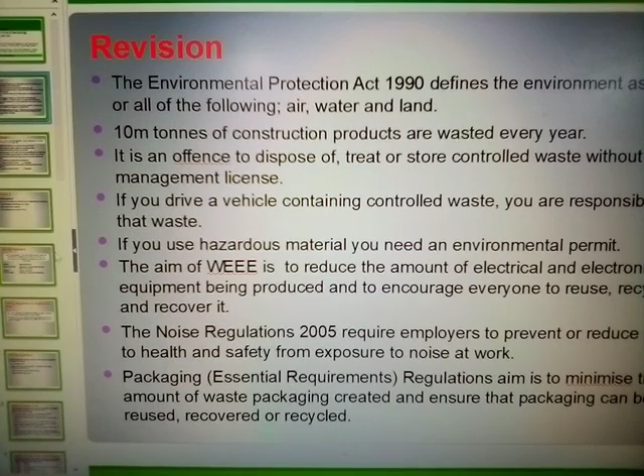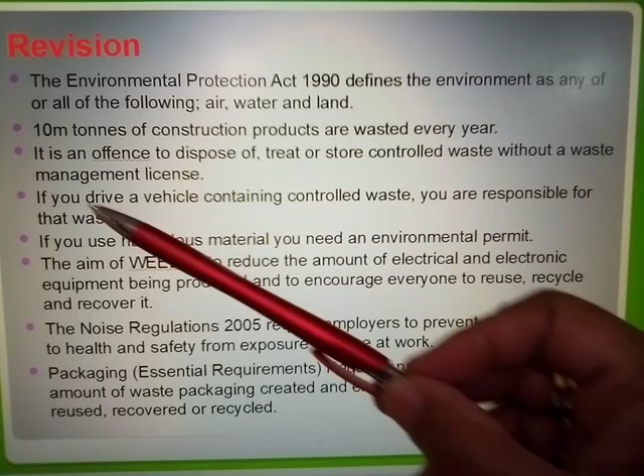Now this just shows us what we were talking about previously in the other section, the Environmental Protection Act 1990 - tonnage, it's an offence to dispose of, etc., if you drive, etc. The information we looked at previously. I don't need to go over this, but you'll need to look at this for yourselves and read the information so you know where you're at.

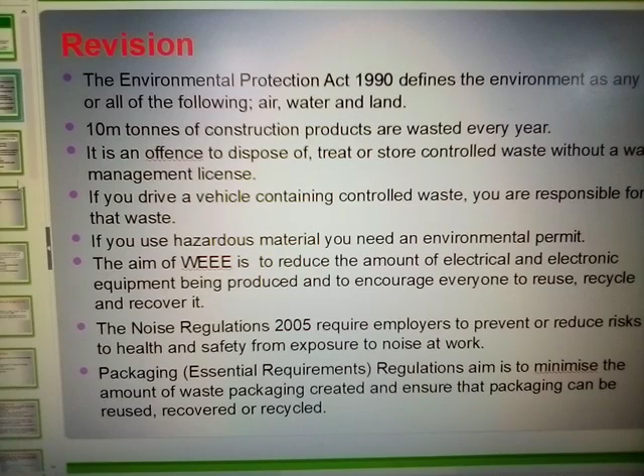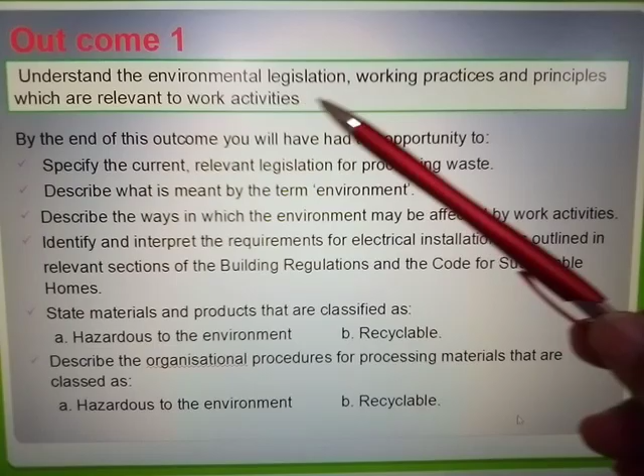Now the outcome that we're going to be looking at is understanding the environment legislation, working practices and principles which are relevant to work activities. And here is your outline for that.

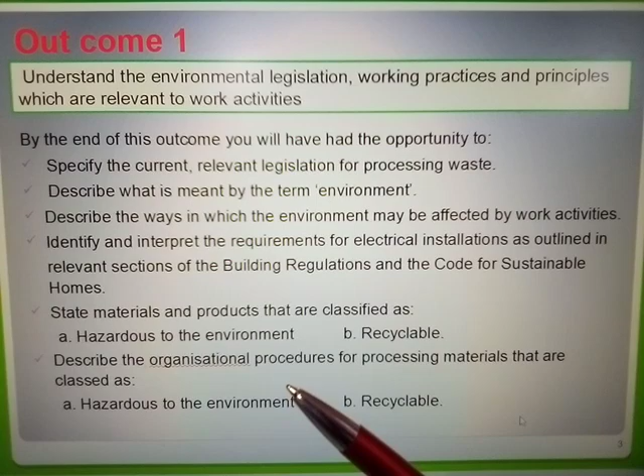So again, read this for yourselves, make sure you understand what's being read, and then do any additional research using the HSE website, because that will give you up-to-date information on any events or changes which have taken place. And again, remember to use the IET regulations.

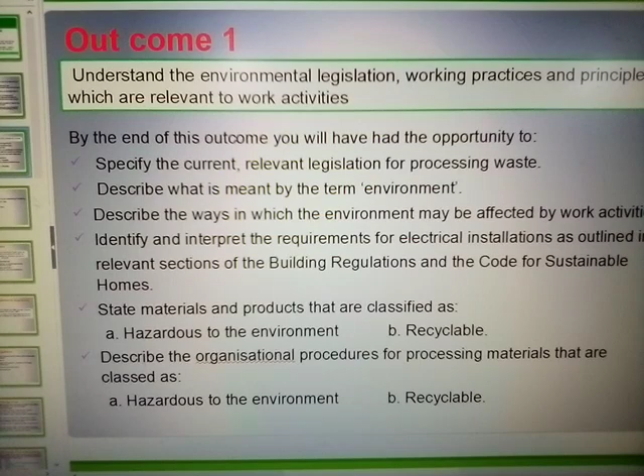Remember one thing, you can never know too much, okay? There is no such thing as too much knowledge. You have knowledge, use it.

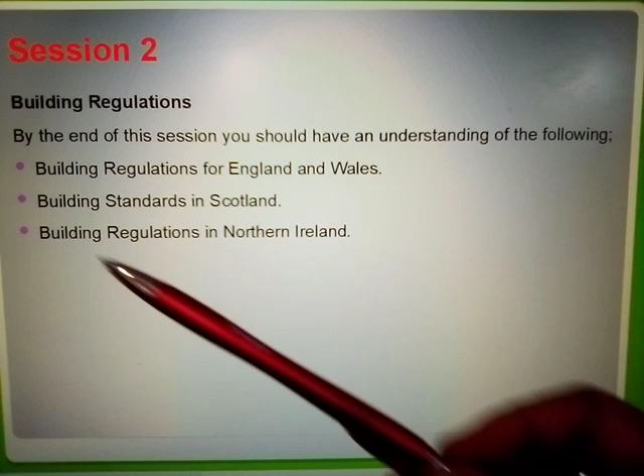Now building regulations - that's what we hope that you would have learned by the end of this session, okay?

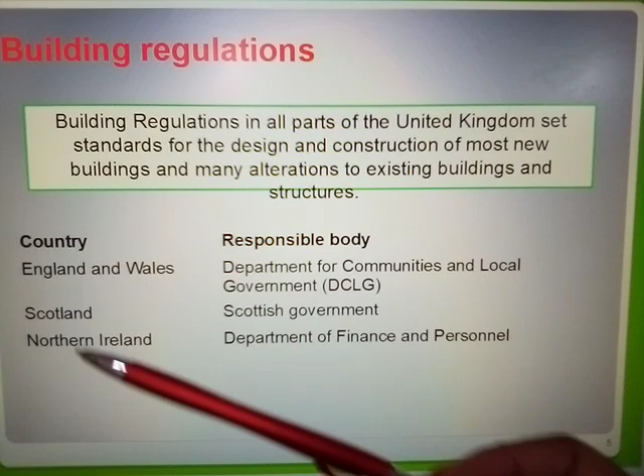Now the building regulations apply to all parts of the United Kingdom, okay? It sets standards for the design and construction of most new buildings and many alterations to existing buildings and structures. Country: England and Wales, responsible body: Department for Communities and Local Government. Now keep an eye on this, because as you know, government departments change and develop new names, okay? And these are where you would find them under in different parts of Scotland, Northern Ireland, okay?

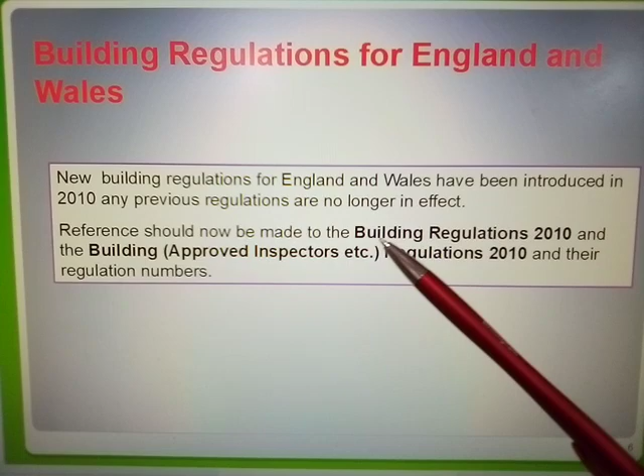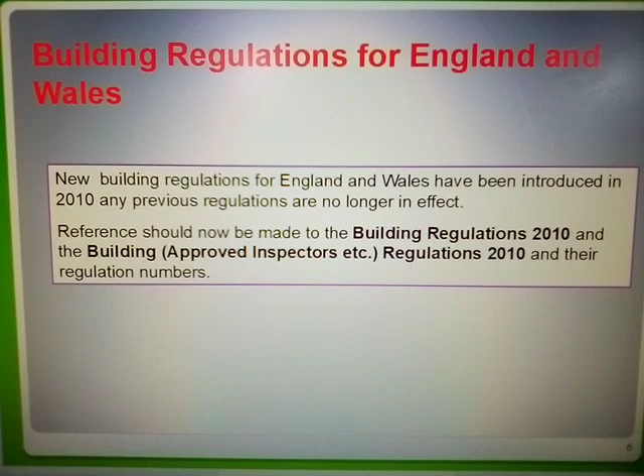Now building regulations for England and Wales. New building regulations for England and Wales have been introduced. 2010 - any previous regulations are no longer in effect. Reference should now be made to the Building Regulations 2010 and the Building Approved Inspectors, etc., Regulations 2010 and their regulation numbers. Now again, be aware that there could be changes to that also since, so we need to keep an update on that, okay?

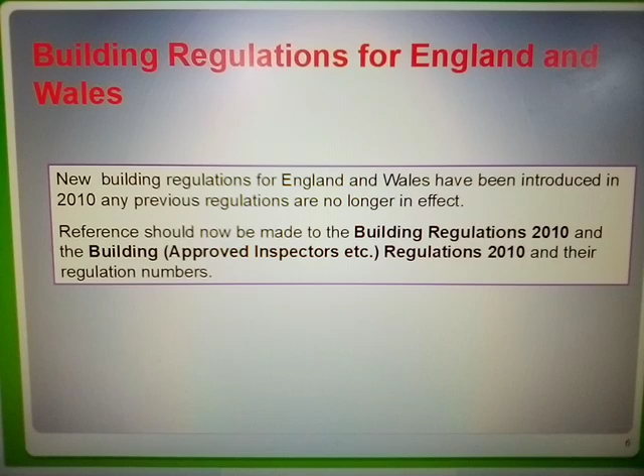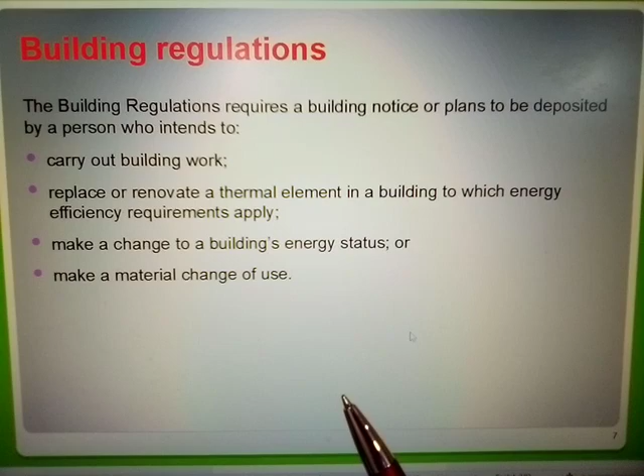Building regulation requires a building notice or plans to be deposited by a person who intends to carry out building work, make a change to building, or make a material change of use. So if you're looking to do any changes, you'll need to be aware that certain legislations will be in place, and you need to check those legislations before you do any building work of any kind. Again, make sure you read this information for yourselves, okay? Building regulations.

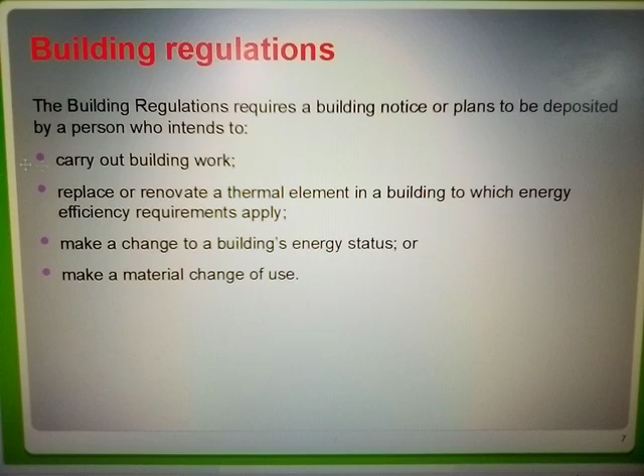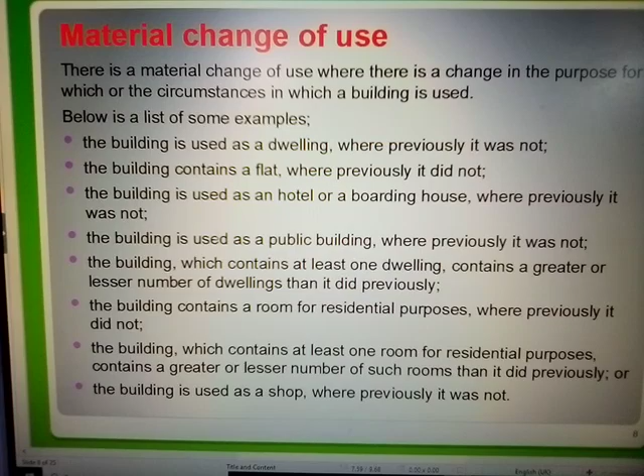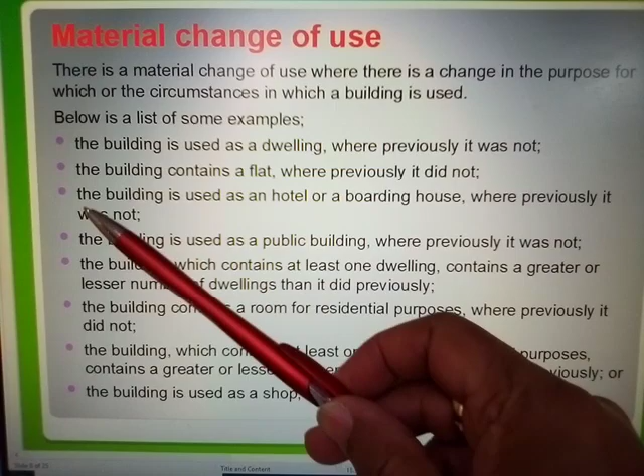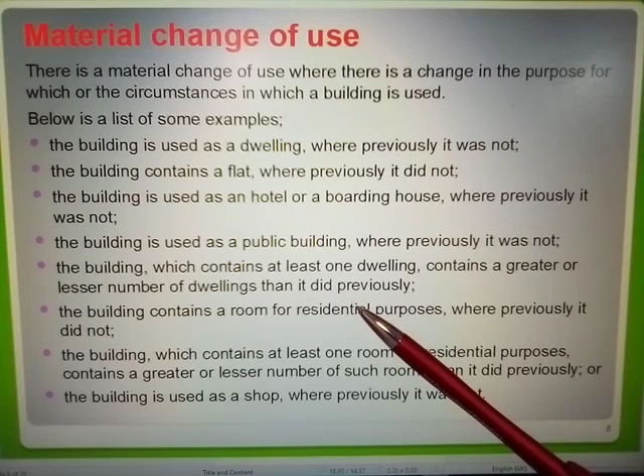Now here, material change of use - this just gives you a list. There's material change of use where there is a change in the purpose for which, or the circumstances in which, a building is used. Below is a list of some examples: buildings used as a dwelling where previously it was not, etc., etc. So again, read the information for yourselves, be aware of the building use, and make sure that you are familiar with this. If you're going to rewire a building, you need to be aware of any legislations that might apply to that building, whether it's a listed building, etc., or not.

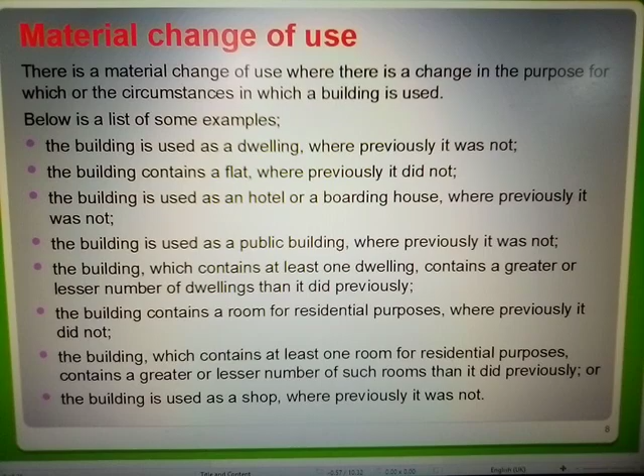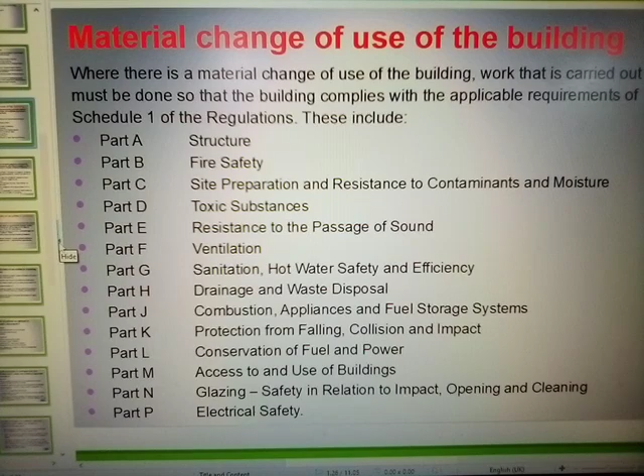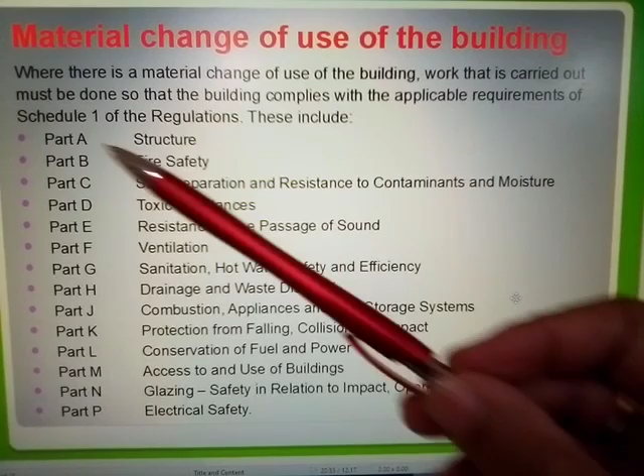Now, material change of use of the building. Where there is a material change of use of the building, work that is carried out must be done so that the building complies with the applicable requirements of Schedule 1 of the regulations.

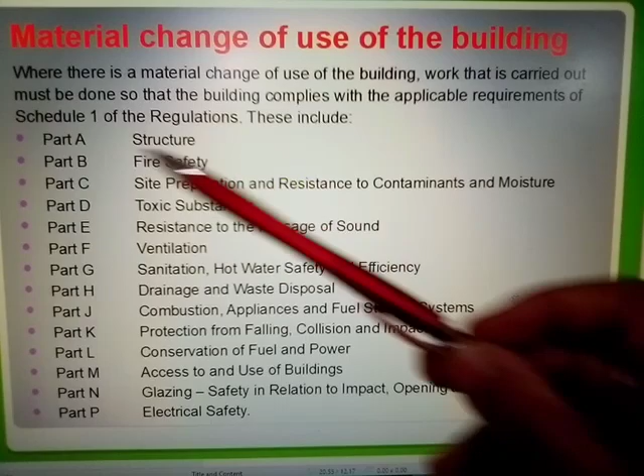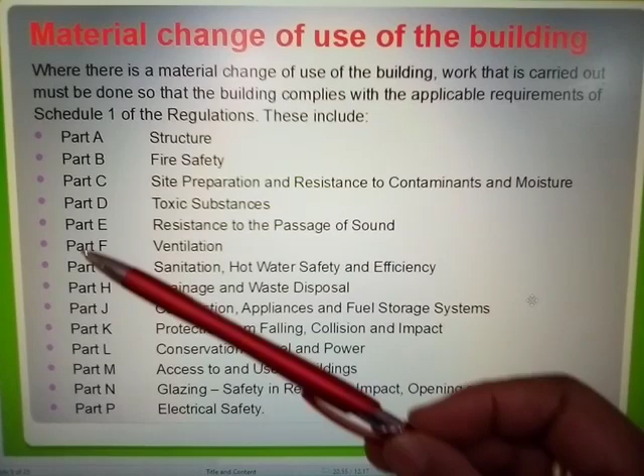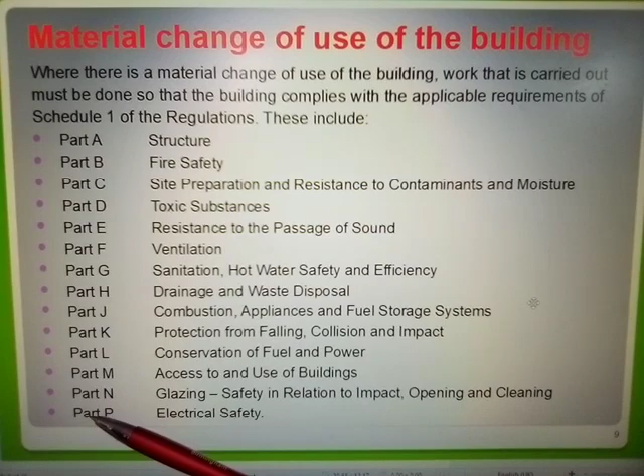These include Part A, structure; Part B, fire safety; Part C, site preparation; Part D, toxic substances; Part E, resistance to the passage of sound; Part F, ventilation; Part G, sanitation; Part H, drainage; Part J, combustion appliances and fuel storage systems; Part K, protection from falling; Part L, conservation of fuel and power; Part M, access to and use of buildings; Part N, glazing - safety in relation to impact, opening and cleaning; Part P, electrical safety.

Okay, and Part P is what will apply to us, but we have other responsibilities in the sense that we also need to comply with certain parts of this as well, because it affects our working environment.

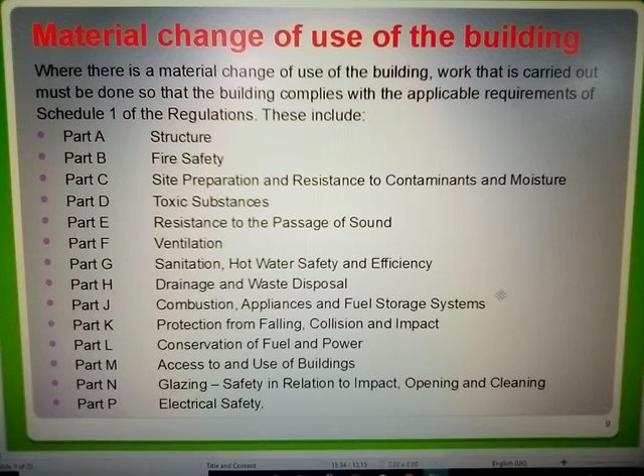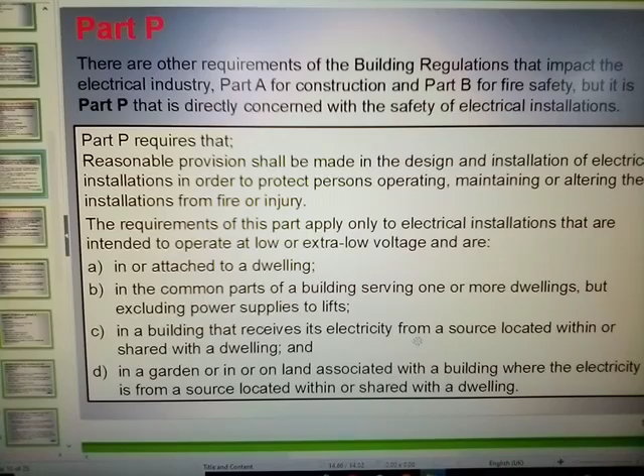There are other requirements of the building regulation that impact the electrical industry. Part A for construction and Part B for fire safety, but it is Part P that is directly concerned with the safety of electrical installations.

Part P requires that reasonable provisions shall be made in the design and installation of electrical installations in order to protect persons operating, maintaining or altering the installations from fire or injury.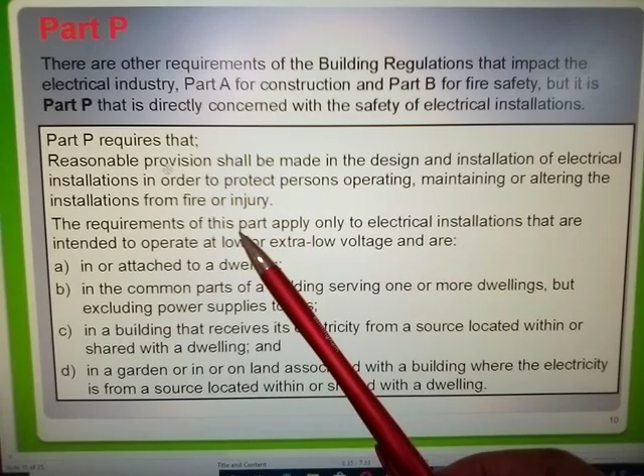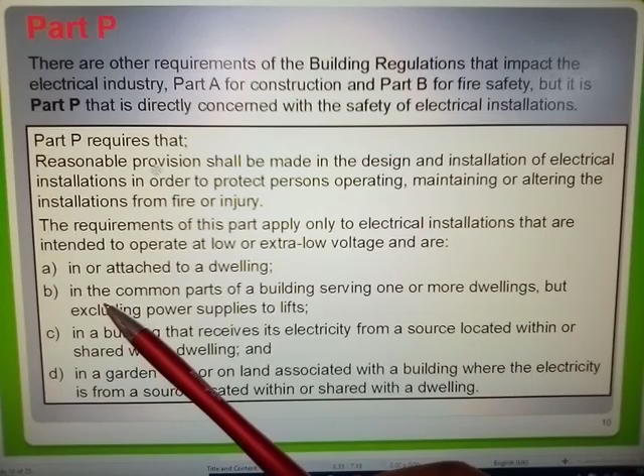The requirements of this part apply only to electrical installations that are intended to operate at low or extra low voltage and are in or attached to a dwelling; in the common parts of a building serving one or more dwellings, but excluding power supplies to lifts; in a building that receives its electricity from a source located within or shared with a dwelling; and in a garden or on land associated with a building where the electricity is from a source located within or shared with a dwelling.

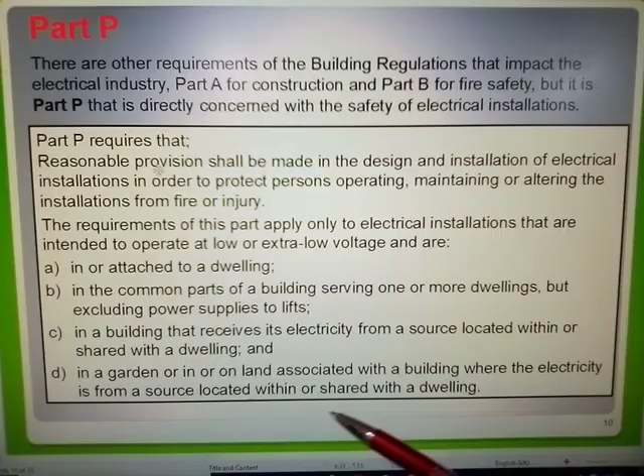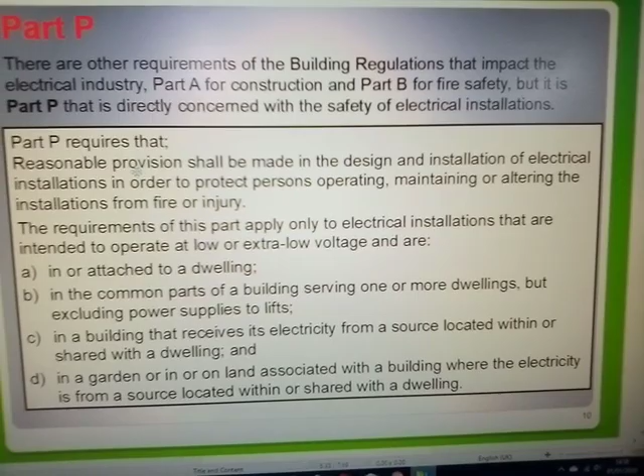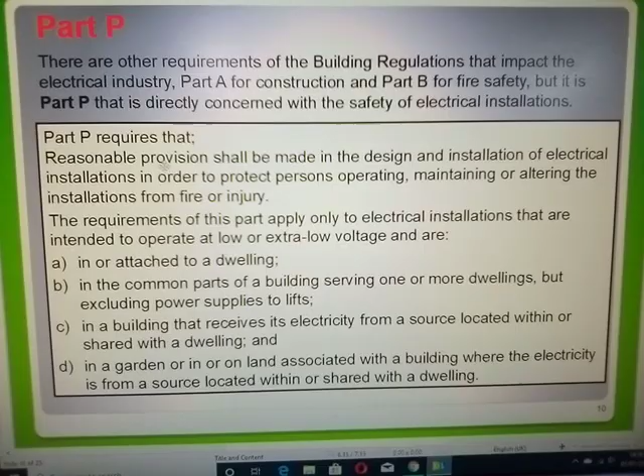Part P is trying to make you aware that in regards to electrical installations, the installation must be done to the IET regulations. Excuse me, I'm still talking in terms of IEE, but let's refer to it now as the IET. I still have some books here actually showing IET and IEE, but we'll stick with IET because that's the current legislation as it stands now - Institution of Engineering and Technology. Refer to those regulations, and all installations should be done to that standard.

You'll find that it actually specifies a section in regards to Part P and what it would expect you to be doing in regards to that. So follow IET specifications.

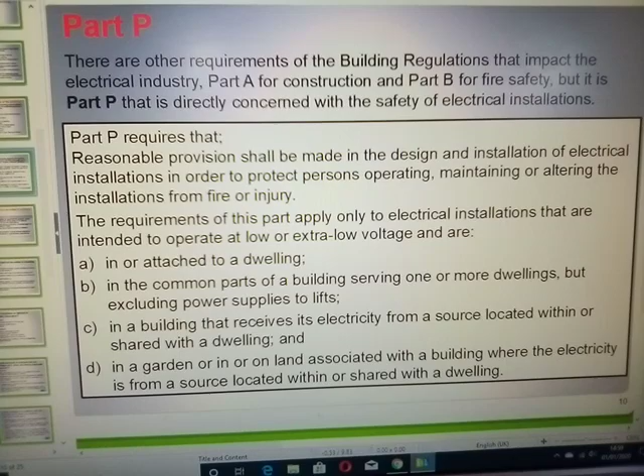I'm just trying to make sure that I've not missed out any slides.

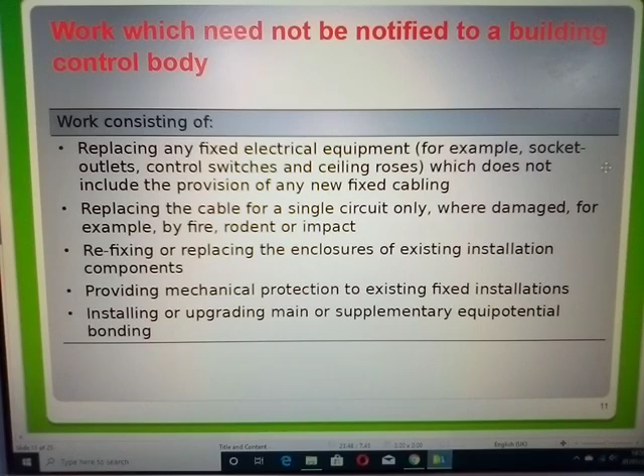Work which need not be notified to a building control body: work consisting of replacing any fixed electrical equipment, replacing the cable for a single circuit, refixing, replacing the enclosures, providing mechanical protection, installing or upgrading main or supplementary equipotential bonding.

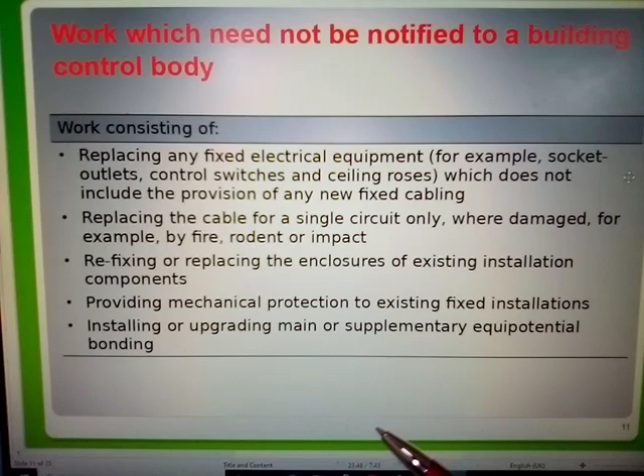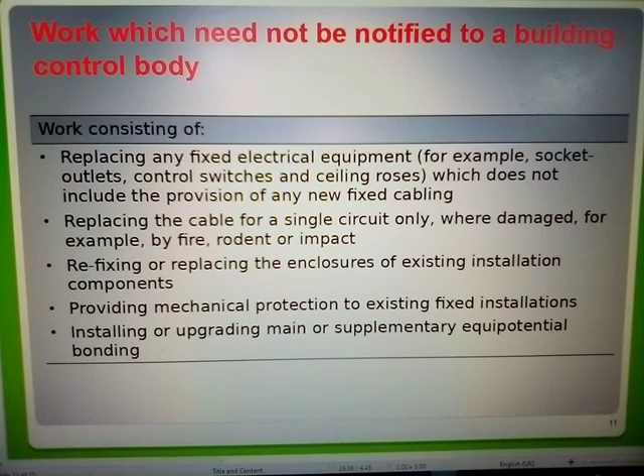Those simple changes are the only ones you're allowed to make, I believe. But again, check in regards to the regulations and check with your controlling body to ensure that you are kept up to date with any changes which are taking place or which have taken place.

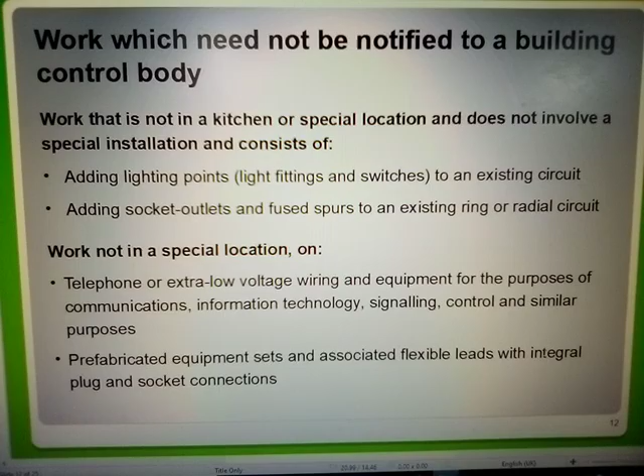Work which need not be notified to a building control body: work that is not in the kitchen, also not in a special location, and does not involve a special installation, consists of adding lighting points, adding socket outlets. Work not in a special location, telephone extra low voltage wiring, etc.

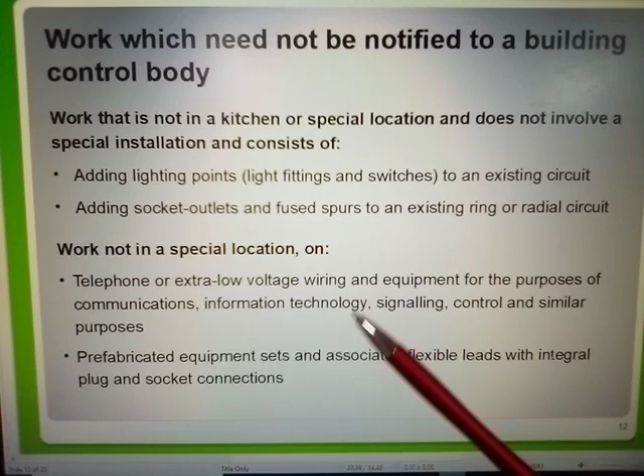You can read this for yourselves, don't need me to read this to you now. So make sure it's all in.

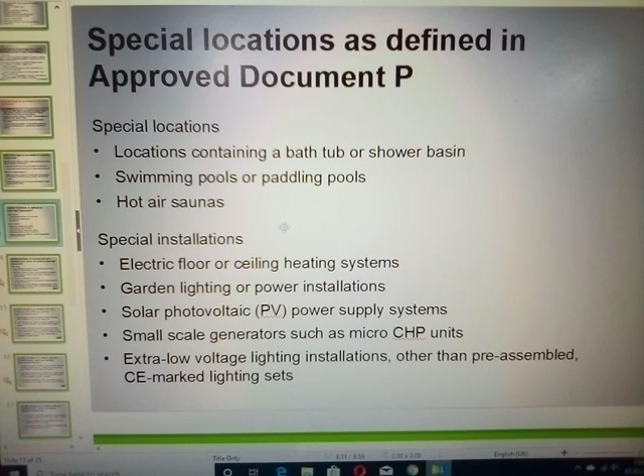Now, special locations - again, this is specified in the IET regs for special locations. Special location: locations containing a bath, tub or shower basin.

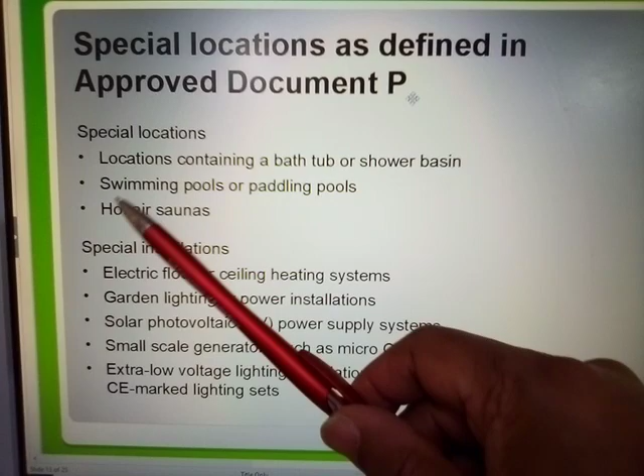Swimming pools or paddling pools, hot air saunas. Now, some of you might have heard of the drowning of a gentleman and two children in Spain recently. You can see here swimming pools are considered to be a special location, so it's interesting to know what events would have caused that tragedy when so much care has gone into making sure such events don't actually happen.

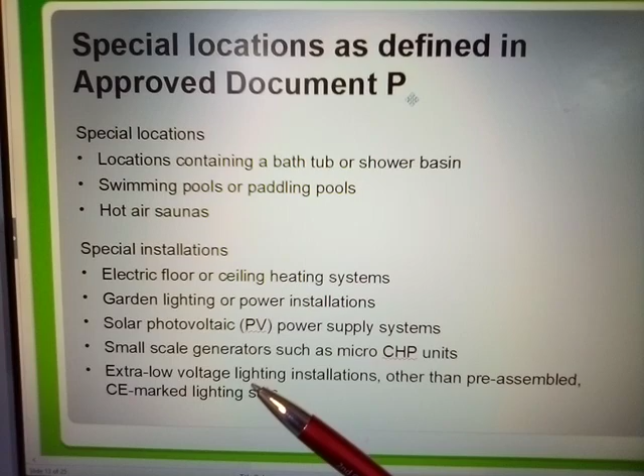But nonetheless, I suppose these things are unexpected.

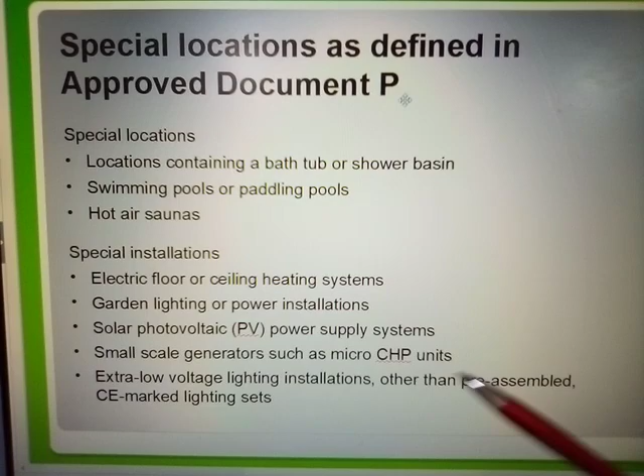Special installation: electric floor or ceiling heating, garden lighting, solar photovoltaic cells, small scale generators such as micro CHP units, extra low voltage lighting, etc.

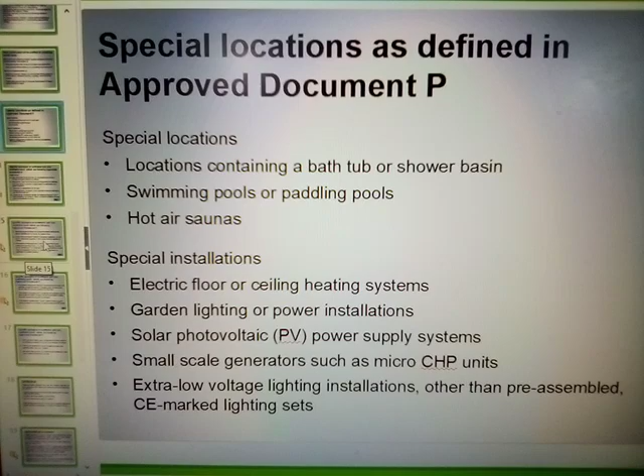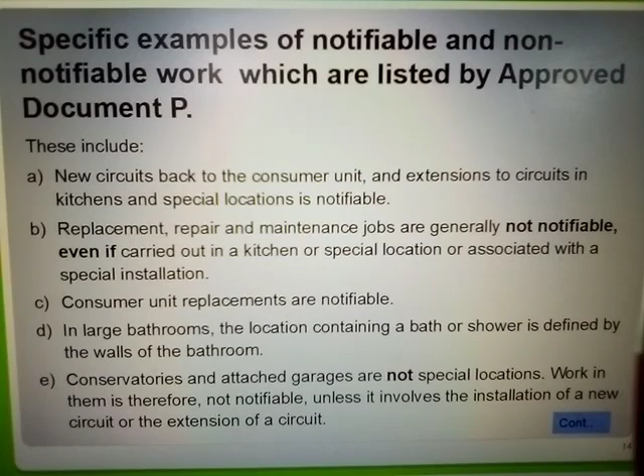Right, specific examples of notifiable and non-notifiable work which are listed by approved document P. Now, for some reason it's come to my mind there may have been some changes regarding document P, but I am not quite sure. Please check and confirm for yourselves that document P is still part of the specifications and still required. Something I read the other day seems to tell me it may have been amended or removed, but I could be wrong.

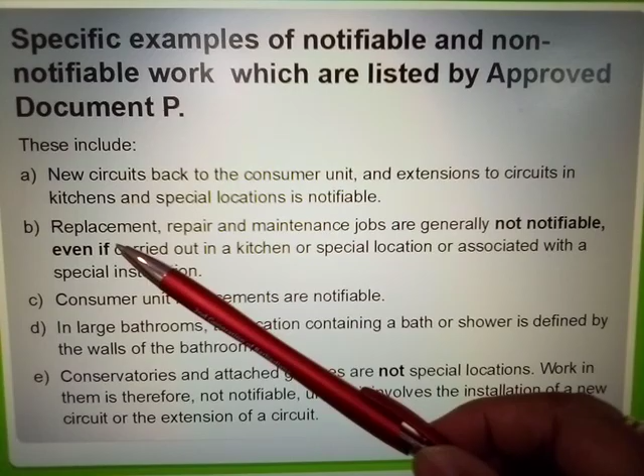Again, read this for yourselves, you don't need me to be reading this to you. Okay, new circuits back to the consumer unit, replacement, repair, and maintenance jobs. Consumer unit replacement is notifiable.

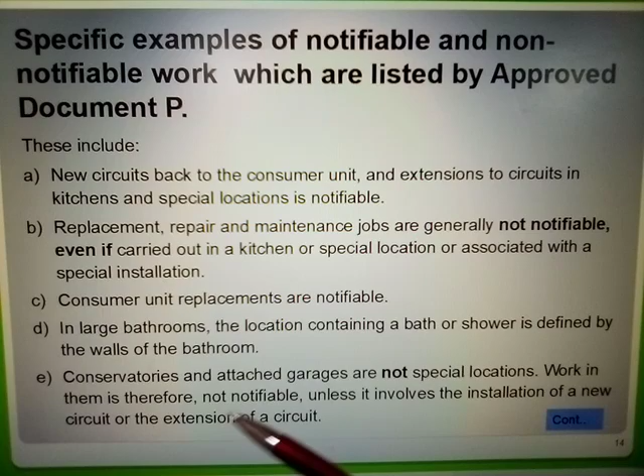In a large bathroom, the location containing a bath or shower is defined by the walls of the bathroom, conservatories, attached garages, etc.

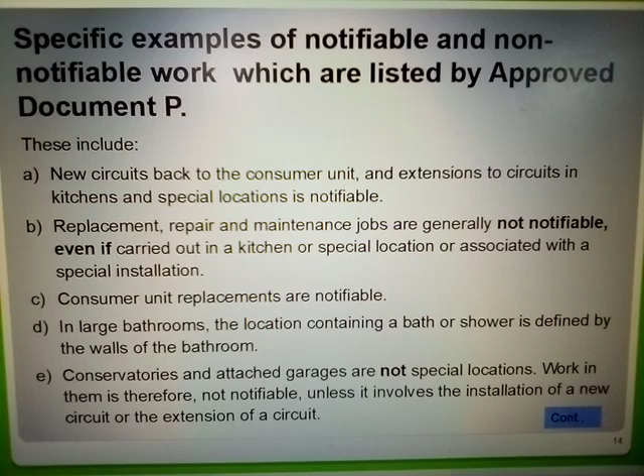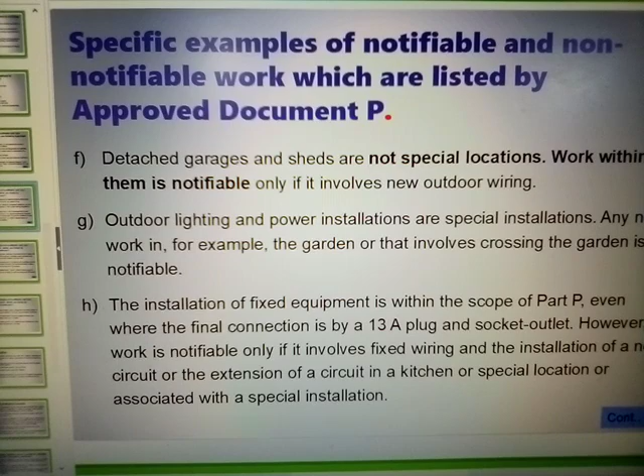Again here, specific examples of notifiable and non-notifiable work which are listed by approved document P. It just simply continues, and you can read this for yourselves. This information is again relevant to yourselves as electricians. You'll need to be able to be aware of this and take note of it.

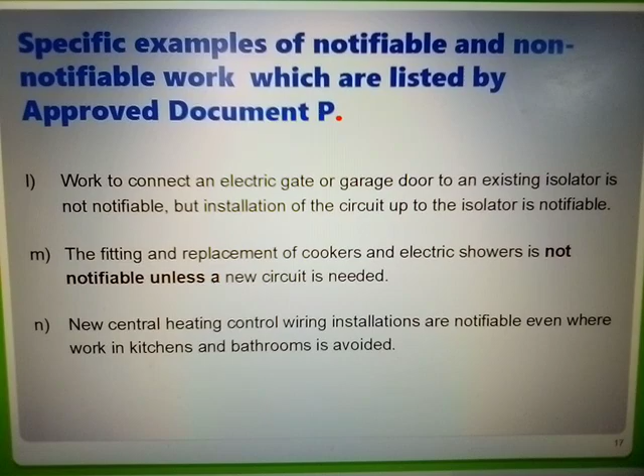And again, still continues on this. Specific examples of notifiable and non-notifiable work. You can read it for yourselves, don't need me to read that out to you.

Certification. These are different documents than a BS 7671 installation certificate, and show compliance with all relevant requirements of the building regulations, not just Part P. Building regulation compliance certificate, completion certificate, and final notices issued by approved inspectors. These certificates are evidence that compliance with the building regulations has been achieved and are issued on completion of notifiable works only.

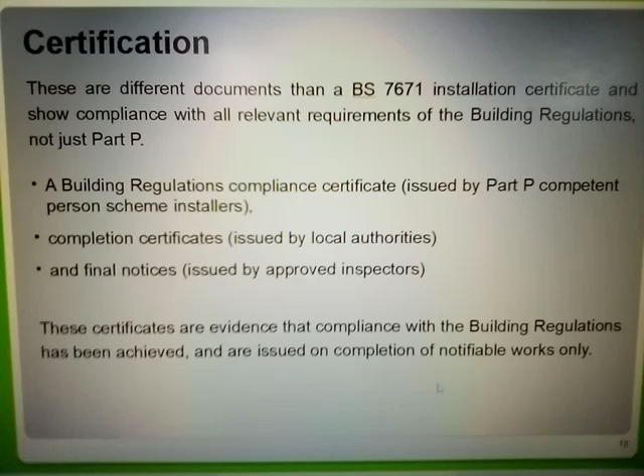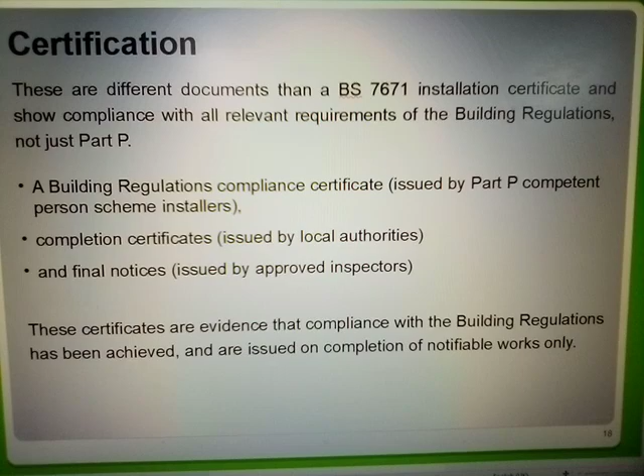Now, installers registered with a Part P competent person self-certification scheme - let me just expand that a little bit. Installers registered with a Part P competent person self-certification scheme are qualified to complete BS 7671 installation certificates.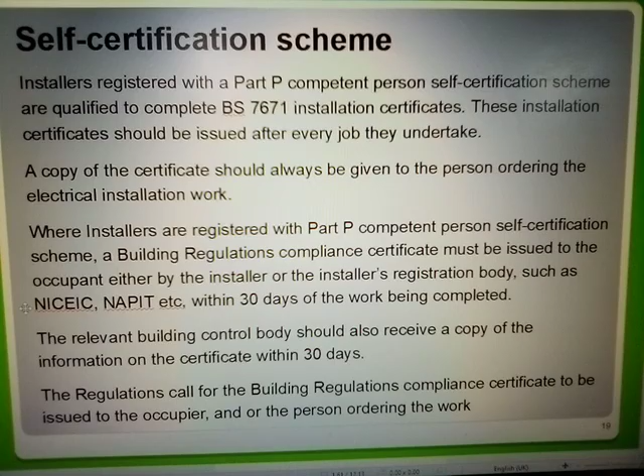These installation certificates should be issued after every job they undertake. A copy of the certificate should always be given to the person ordering the electrical installation work. Where installers are registered with a Part P competent person self-certification scheme, a building regulations compliance certificate must be issued to the occupant either by the installer or the installer's registration body, such as NICEIC, NAPIT, etc., within 30 days of the work being completed.

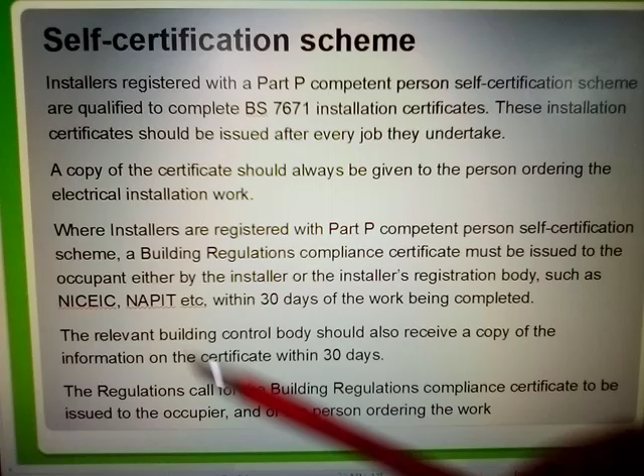Now again, here you can read the rest for yourselves. I'm just trying to highlight the main points for yourselves as electricians.

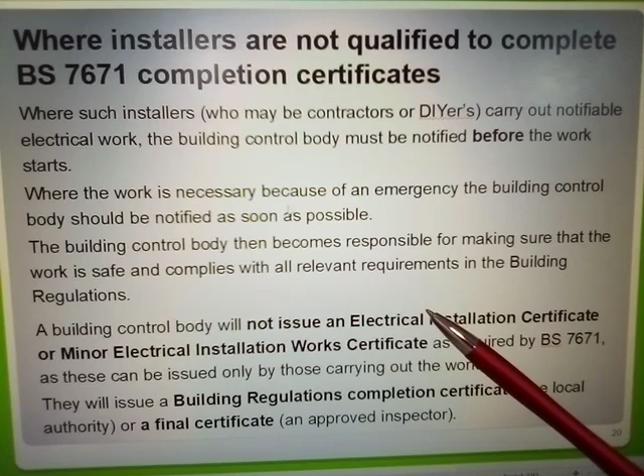And this you can read for yourself, you don't need me to be reading that out to you. I hope that is quite clear in itself.